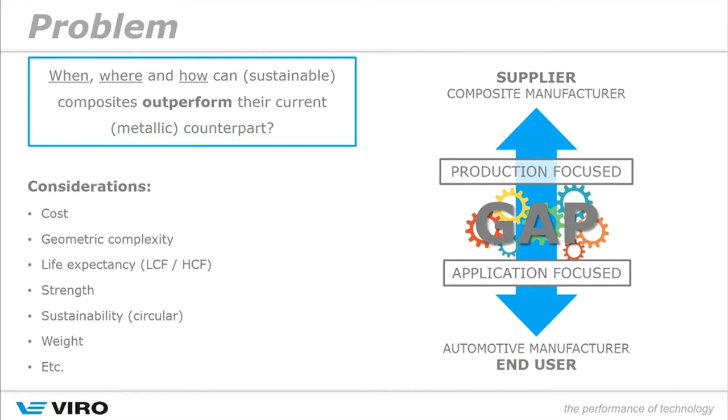But we as an engineering firm, as a group, use many different computational techniques. For instance, most widely known is probably finite element modeling, FEM. But multi-body dynamics is also something that we use often. Multi-body dynamics is used for vehicle dynamics to really get a feel for the loads that are occurring on a car, time dependent, of course.

A multi-domain physics system, these 1D simulations, for instance LMS Amesim, or more known, MATLAB and Simulink. What we do here is, for instance, evaluate electrical drive lines for customers that we have, going from a combustion engine to an electrical drive line. There multi-domain is a topic that's really interesting.

Also, as was said already, noise, vibration, and harshness, because the car is changing from a combustion engine to an electrical car. Different topics pop up. The noise is different. So what kind of effect does it have on my acoustics? That is something that we also do with these computational techniques. NVH is that solution. And then there is computational fluid dynamics, CFD. And that is, for instance, flow-induced forces.

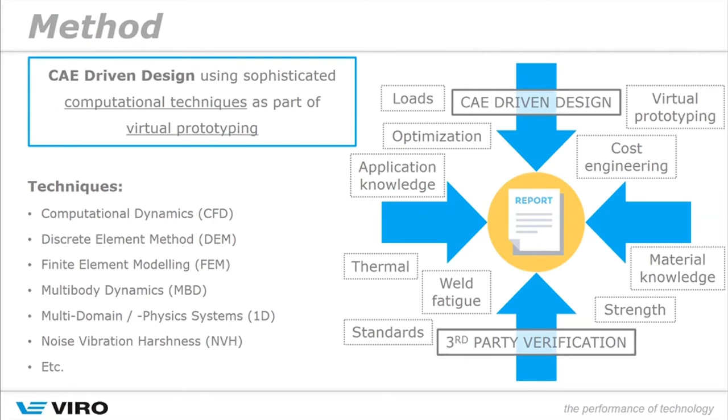And so the CAE-driven design and third-party verification, they come from top to bottom, and application and material knowledge comes from left to right. And there I can see a combination of all sorts of expertise coming together, whereby we think we can bridge the gap between the supplier and the end manufacturer.

So my goal is to combine the material knowledge that we have, the automotive application knowledge that we have, working for trucks, bus, car, agricultural vehicle manufacturers, and also our strength in scientific computing on all these different topics that I discussed before. And if you do this, then you can really identify, design, and verify the utilization of composites. And that opens up many possibilities.

For instance, if you would have 5 metallic components and you would have the idea, maybe those 5 metallic components, I can make one composite part of that. But what kind of loads are there? Is it possible? How is it with lifetime and fatigue and stuff like that? This is all possible in the virtual prototyping.

Also, durability, sustainability, the choice maybe going from a thermoset to a thermoplastic, which are more sustainable. What would this involve? Maybe on strength assessment, that is also a topic that we look into. We are very strong in vehicle safety, so crash simulations. Can, for instance, a part of a chassis be exchanged for a composite, yes or no? And how do you evaluate that? Cost prediction, these are all possibilities that come into play if you combine these 3 things.

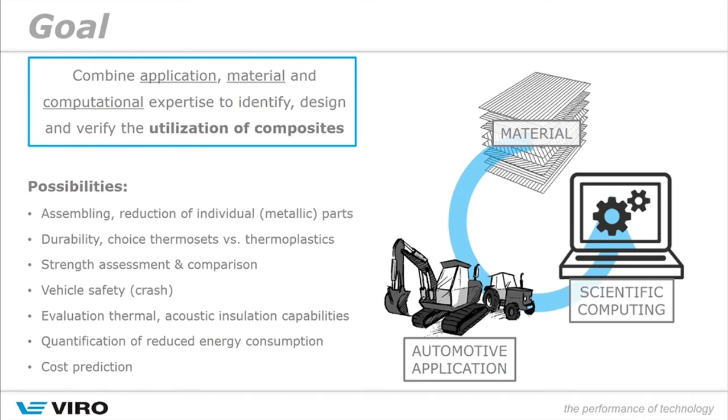The supplier has the material knowledge, we also have the material knowledge. The end user has the automotive application knowledge, we also have this. And the scientific computing comes in there as well. So that is my goal, and this is the goal of my group as well.

So what we have prepared is an example case, a very simple one, nothing really sophisticated. Unfortunately, I can't show you any of the work that we're doing currently, but this will be an exemplary case. In this case, we will take this car on the right side. It's a Ford Taurus, an older model from 2000, and what we'll do is a rollover case. The rollover case that we are trying to simulate here is based on the American roof crush regulation.

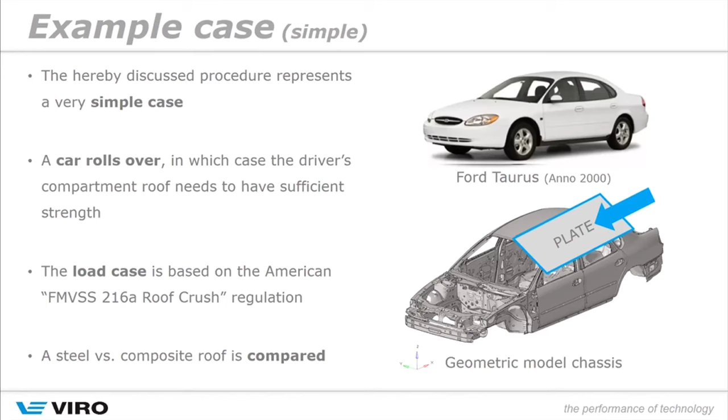So a big part always in these types of simulations in the virtual prototyping environment is the material definition. Now, in this test case we will keep it as straightforward as possible, but always if you make a material model, there are, especially in composites, three parts. You have the material definition. In the material definition, you would put all kinds of material properties.

In the ply definition, you specify thicknesses or other topics that are involved with the ply. And the laminate is just a combination of different plies, how they are oriented, their build-up. These are, for composites, three things that need to be taken into account. And this is the most basic setup, but you can add much more complexity here.

So this now is still not based on any failure and damage, but you could incorporate that based on strains or based on the amount of work that the material is performing. Strain rate dependency is also something that can be put in there, because we're looking into sort of a crash type of simulation. Speed of the plate will be very high, so strain rate dependency will be high. Materials will behave differently because they are indented very quickly.

Also, you can have laminate position dependency, where a ply is in the laminate will also have an influence. But you can still add many more complexities. I do not want to go as far as the academic side. For instance, the universities, they go to the molecular level. This is not what I'm looking for. I still want to make it efficient and not go into too much detail, but this still allows me a lot of fine-tuning already, and it will allow me to make a good comparison between the current metallic variant versus the composite variant.

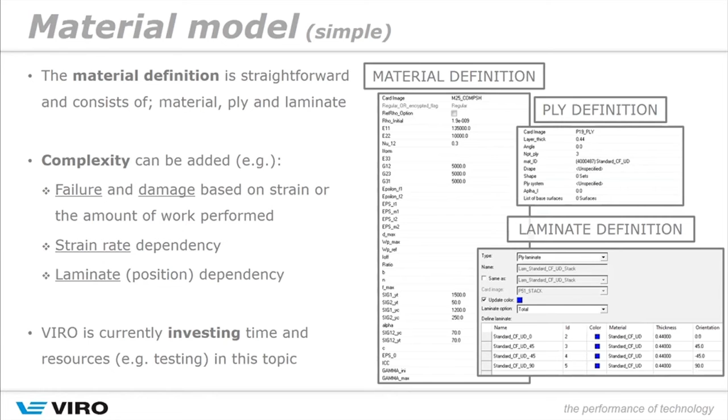The FE model here is a very simple one. In this case, we have the Ford Taurus chassis, and what we will do is exchange the light blue on the image for a composite. Now, this composite is also really straightforward. It's a unidirectional carbon fiber, so nothing too fancy. But it is an explicit calculation, Radioss.

So the program that we use is the same program that all the other car manufacturers are using for crash simulations. HyperWorks, which we use right here, is the standard for this type of simulation. You also have LS-DYNA, for instance, but this explicit variant is very well used in these situations. It will also be time dependent and nonlinear. It's really a crash simulation.

And one thing that also needs to be stated here is that all the connections are very basic. So we do not look into the welds in too much detail. Everything is more or less oversimplified, but still all the connections behave elastically. So there is some realism there as well, so it's not too far away from reality.

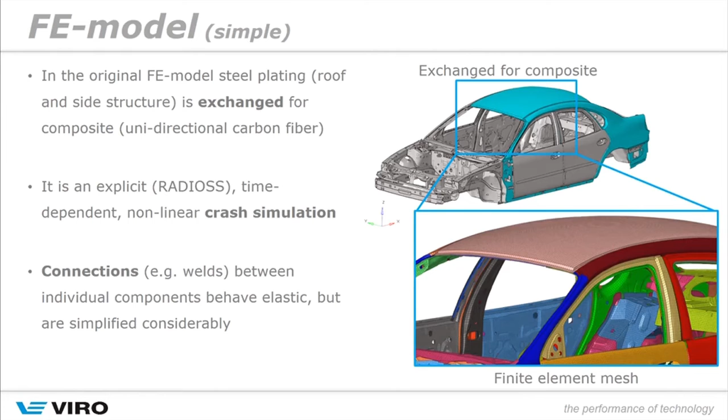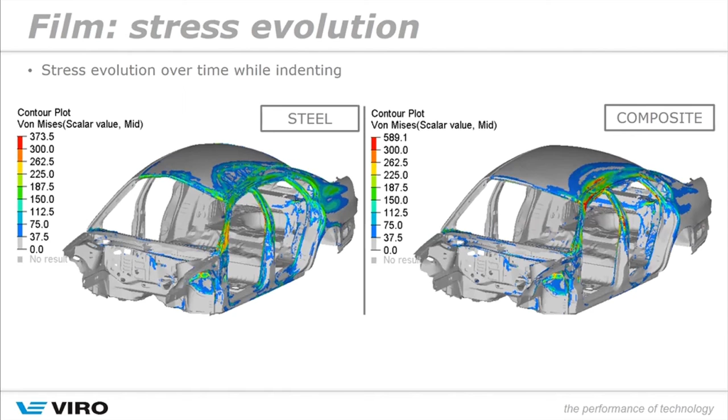So then if you start the simulation, you have this plate, it starts indenting the chassis. On the left, you see the steel variant, the original chassis. And on the right, you can see the composite variant, where a part of the side structure has been exchanged for a composite and where the roof has been exchanged for a composite. And you can already see in these images that the steel component is deforming more than the composite variant.

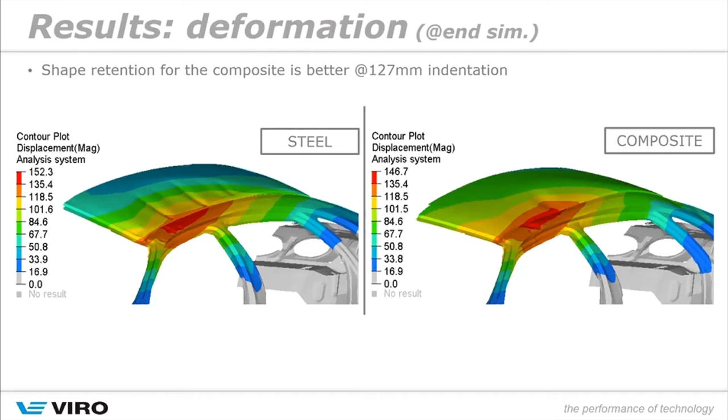And this is the deformation at the end of the simulation, when the plate, conform regulation, is 127 millimeters indented. You can see this wrinkling occurring in the steel variant. You can also see that you will have a little bit more deformation, more buckling, and with the composite that's not the case. But this is just a very simple kind of result. This is also not the result that we're really looking into.

What we really want to know is how much force can the steel variant, the original one, support, and how much can the composite take up? If you look at this, at 30 kilonewtons, you can see that the steel variant is at its peak. And this is when a displacement of, let's say, 61, 62 millimeters has been undertaken. And the 30 kilonewtons for the composite variant is earlier, so the composite variant behaves better. And it will even go up further.

But already you can see, I've written it down here on top, the regulation from 2009 prescribes that at least 3 times its own weight needs to be carried. So in 2000, when the Ford chassis was designed, the regulation was different. It needed to be 2 times, so exactly where it is right now in this image. But the regulations have gone up. But still, also with the composite variant, that is what I wanted to say, you're not there. So there still needs to be some tweaking.

And this is something that we didn't know beforehand. It's just an exemplary case. You can go into much detail, but if a customer would say, yeah, I really want to do this, I want to implement the composite, how can we do this? Then there are different ways to go about it. But for that, I'll come to a slide later on.

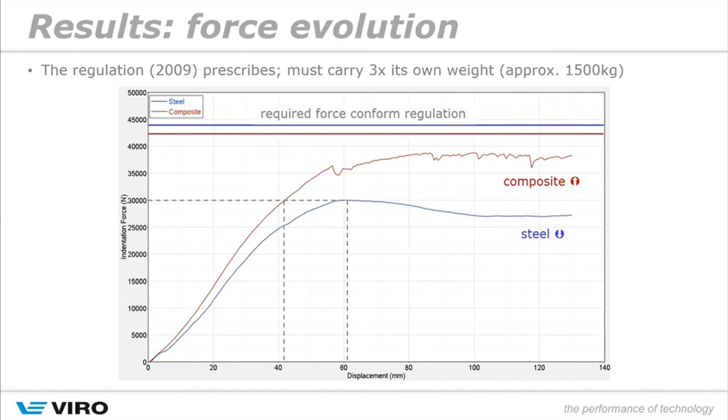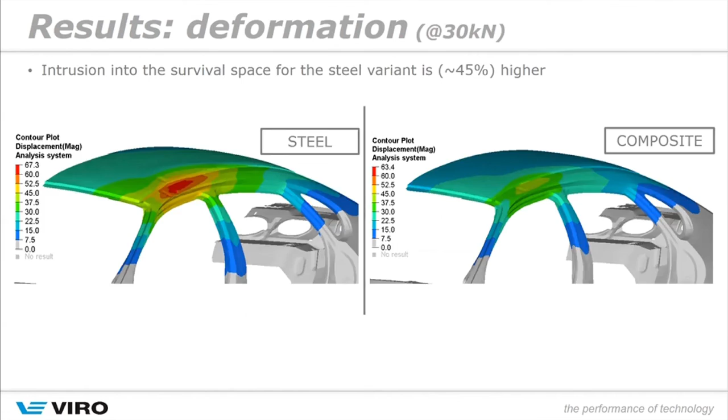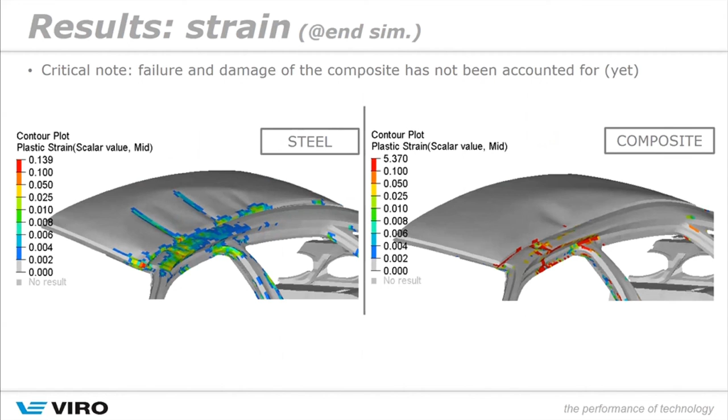If you're looking now exactly at 30 kilonewtons, on the left side you can see this 45%, and there is the intrusion survival space here. So the composite variant functions way better. Also, the absorbed energy is better for the composite. But I have to make a critical note here. It's an exemplary case. The critical note is that failure and damage is not taken into account yet. So on the right, you can see many elements are red, and normally in this type of material, 0.1 strain would be the maximum allowable strain. As I said before, in this material definition, you can go into much more detail and implement this, and then those elements would have been taken out of consideration.

This is my final slide before my conclusion slide, so please allow me to explain this, because I think this is a very important slide. This is also the one that comes into play with the advancements in simulations. So we started with this initial model, which is a steel variant. One could have said, we'll start with a composite throughout. In that case, you can also do numerical methods or an iterative process. And if you would do this iterative process, then you would have a sort of topography optimization where you can say, thicken where it needs to be thickened, where there are a lot of stresses, and thin it where it's possible to thin.

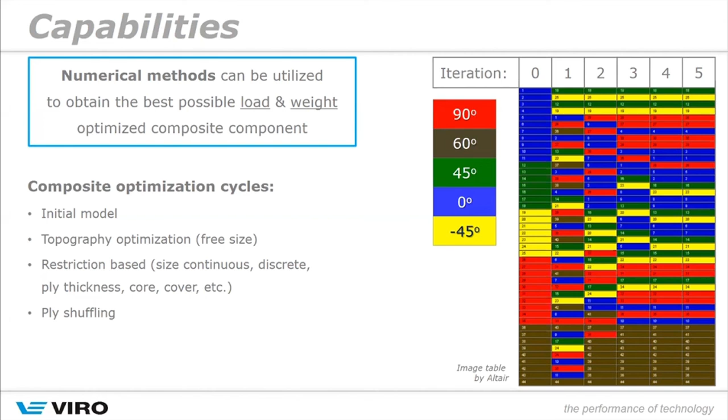And this is no guessing game. The computer does this. This is a sort of algorithm. It's a numerical method, but you can make restrictions on it. You can say, if you implement material, then implement a layer of 0.4 millimeter thickness. And if you implement a layer, then take a surface of 20 by 20 centimeters, for instance. And what you can see on the right is also an iterative process where the orientation of the layers is shuffled. So you start out with a very simple setup, but there is no guessing game involved anymore. You get, in the end, the best possible load and weight optimized composite component.

So my conclusion slide then at the end. What I've tried to explain is that the knowledge gap between supplier and end users, I think, can be bridged by CAE-driven design. Virtual prototyping will be very helpful for identifying, designing, and verifying those functional composite components. And in my last slide, I tried to explain that through numerical methods and iterative process algorithms, you can really get a load and weight optimized composite and no longer have this guessing game and these long cycles of development. And that is where we would like to step in and are also investing the next 20 months.